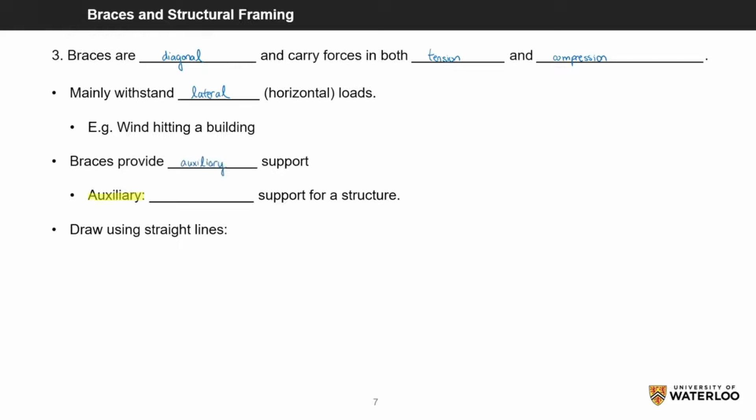Braces are usually diagonal members that can carry both tension and compression forces. Braces mainly withstand lateral, or in other words horizontal loads, such as wind hitting the wall of a building. Braces help to increase stability in a structure and serve as a secondary support, which is termed auxiliary support.

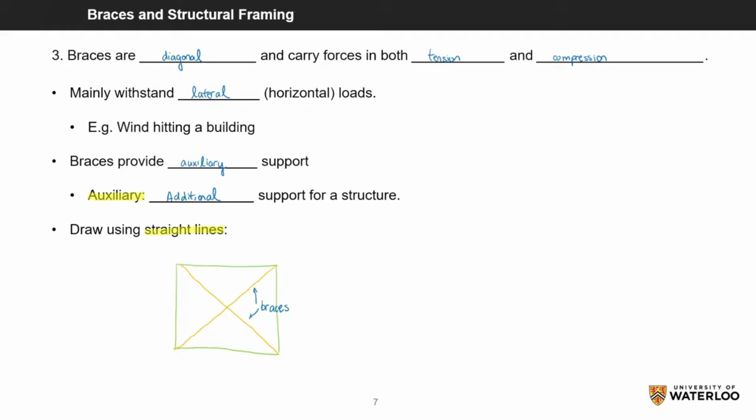Like beams and columns, we draw braces using straight lines. The lines in yellow are the braces. We will now examine how braces resist forces.

If there is a force applied from the top left, the brace highlighted in purple will be compressed, and the other brace highlighted in blue will be in tension. If a force was applied from the top right, then the brace highlighted in blue will be in compression, and the brace highlighted in purple will be in tension correspondingly. When braces are carrying a force, one brace will be in compression while the other will be in tension.

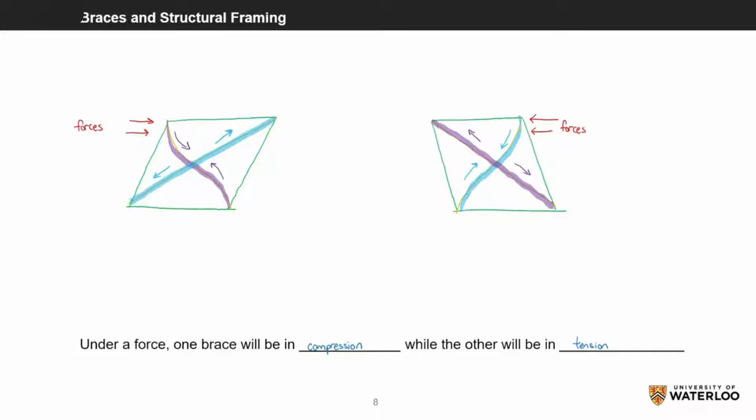Pause the video here and see if you can identify where the braces are in the structure. Here are the braces outlined in purple. Now, assume a wind force was hitting the building from the top left. If there were not any braces and the load was strong enough, the building will collapse to the right.

Since there are braces, the brace colored in blue will be in compression and the brace colored in green will be in tension to prevent the building from falling.

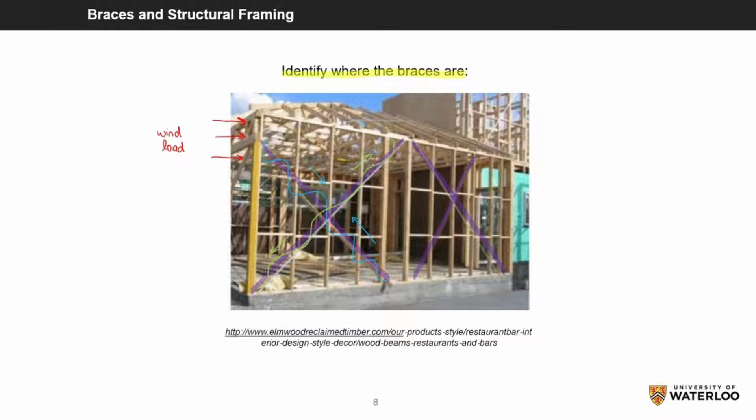There are different kinds of structural framing, and we will look at two types. Trusses carry forces in both tension and compression. They do not carry moments or allow bending to be transferred from member to member, since the connections are pin joints. Recall that pin joints carry forces in the X and Y direction but do not carry moments.

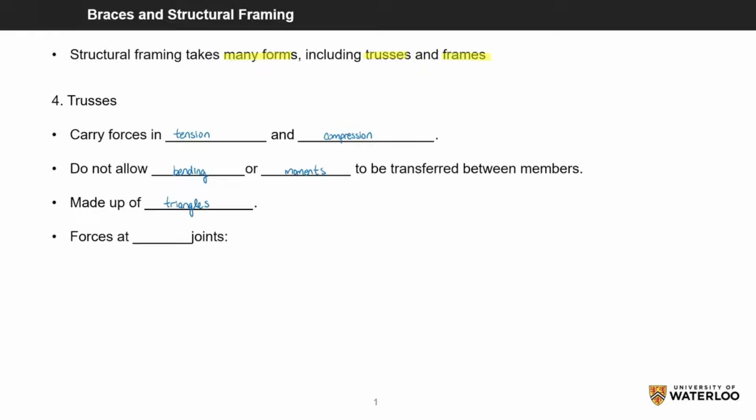It should also be noted that trusses are mostly made up of triangles. When we show forces being applied to a truss, typically they are only applied at the joints. They are drawn with straight lines as the individual members and pin joints as circles for the connections. I have drawn an example here with yellow lines as the members and green circles as the pin joints.

If we assume there are forces acting vertically downwards at the joints of a truss, the forces will be distributed downwards until they reach the bottom members, which then distribute the forces outwards. I have shown the direction of the forces with blue arrows here.

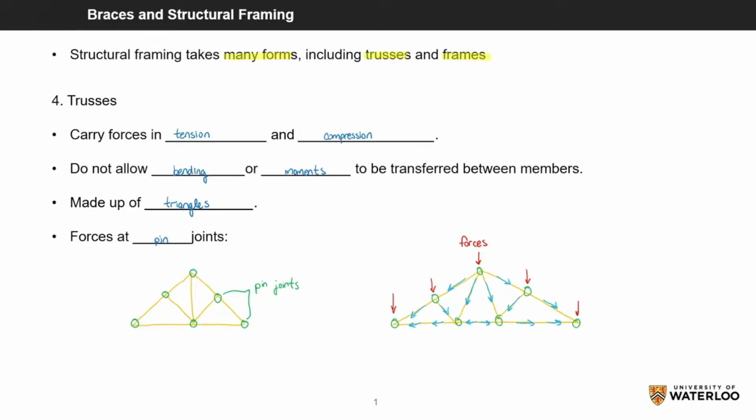This is an example of a truss in real life. See if you can determine which part is the truss. I have outlined the truss in purple. Assume there is a force acting perpendicular to the joints of the truss. See if you can draw in the force arrows. There are forces in both tension and compression here. The forces will be distributed in the direction of the green arrows I have drawn.

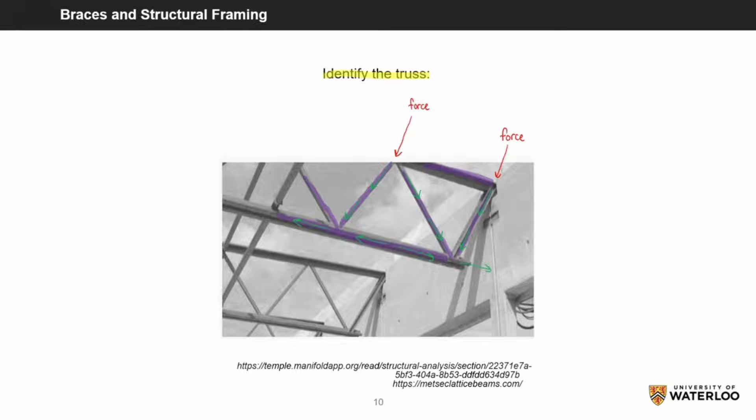Frames are different from trusses because they have full moment connections, which means that they do transfer bending and moments from member to member. Recall that a full moment connection is a stiff connection and does carry moment.

Loads can be applied along the members and not only the joints, because the members can carry forces by bending as well. They are drawn with straight lines as the individual members, but without pin joints for the connections. I have drawn an example of a frame with straight members in yellow here.

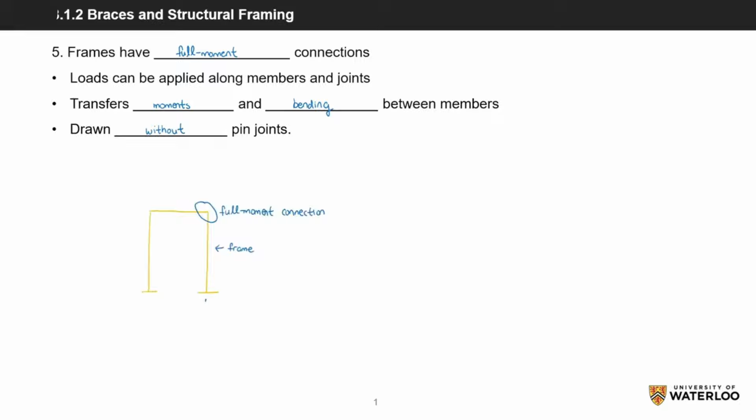We will now draw a frame and assume a force is applied vertically downwards at the top. The beam on the top is carrying the load by bending, which I have shown with green arrows. The beam then passes the force to the columns that carry the force through compression, which I have drawn in purple. This goes back to the beams and columns that we learned about earlier.

To avoid confusion, the arrows I have drawn mostly represent how the load path is distributed, and do not represent how the forces are being carried by the members.

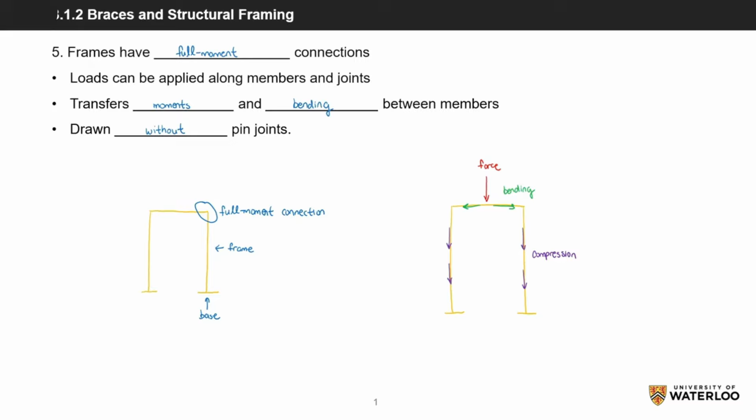Pause the video and see if you can determine how this door frame would distribute a load using the information provided in the previous slide. We will assume there is a vertical downwards point force acting at the middle of the door frame. The beam along the top would distribute the force outwards by bending.

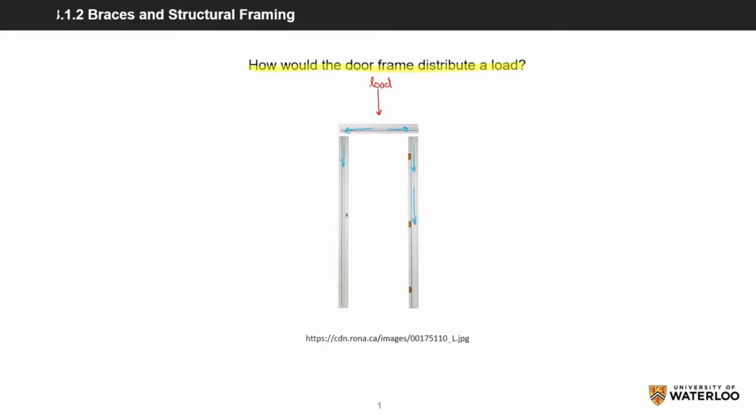It would then pass the force to the two columns on either side, which carry the load by compression, and distribute the force eventually into the ground. Follow the direction of the blue arrows I have drawn for a visual representation of the load path through the frame.